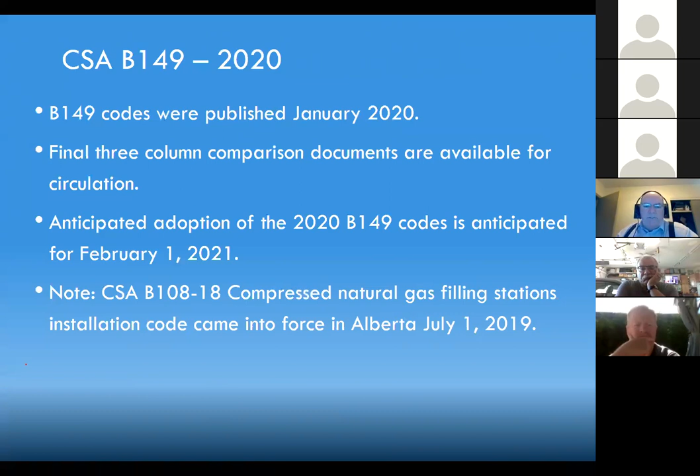I've got a couple of slides in this presentation like this that kind of keep us on topic for the major things. So these are the big things, kind of a snapshot of what we've seen in the codes. And like the last few cycles, there's been a lot of work to move propane stuff into the propane handling code, installation stuff back into the B149.1, vehicle stuff, make sure it goes into B149.5, and then what's part of an installation versus what's part of a piece of equipment or an appliance, and let's get them separated so that we don't have installers trying to figure out how to deal with approvals and certification of products that needs to go somewhere else.

So there's been lots of that movement, and again, lots of clarification to align with things that are happening in standards, both in updates, but as well I've used language in here regarding a vehicle refueling appliance, a VFA, regarding VRA. So we've used VRA for decades, but nobody else globally uses that. So this code now aligns with those reference standards, and we're going to see lots more of that type of work as natural gas expands out into different markets.

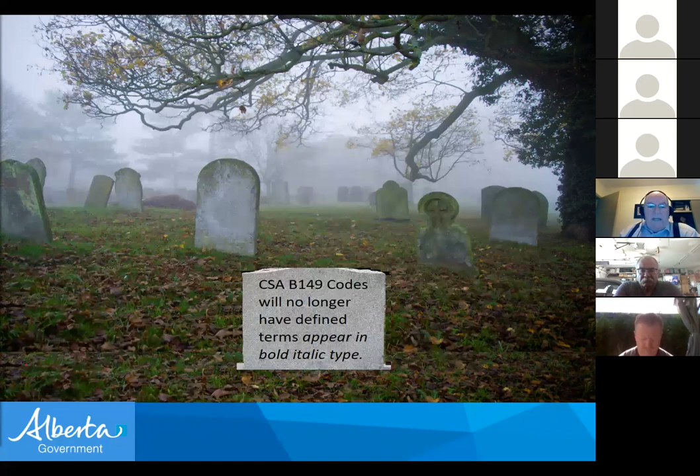So there's no bold, no underline, no markups. The codes come clean, and it's up to us to figure out what to do. So the 3-column documents are probably the best way to get that confidence. I'm not saying it's necessarily a shortcut, but CSA has made a bunch of work for every individual by managing some of their risk through disconnecting or discontinuing the ability to do this. There are a number of codes changing this way. We're not the only one, but do watch that because it's going to be some real challenge.

Now that we've started talking about some definitions, there's lots of them in there. I didn't bring up a number of them, but this is one: safe location. There were challenges nationally regarding what is the safe location.

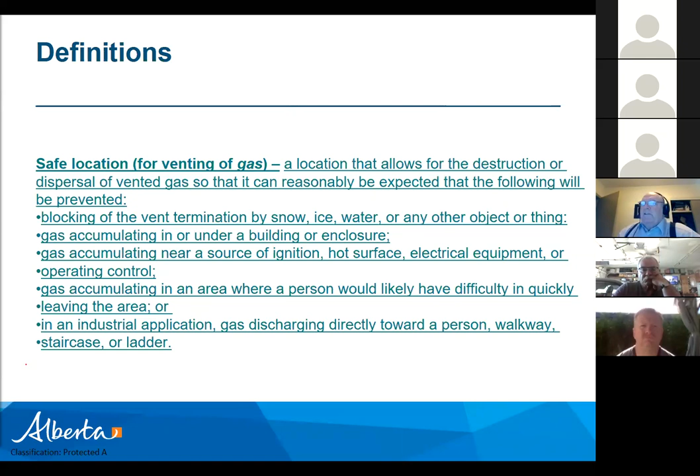If we got a terminal for a vent and it used to say outside, well, that's fine. But what happens when you're outside at an industrial site? What happens if you're outside and you terminate by the spot where people walk along with their cigarettes? So this was about trying to consider those other things. And also, what happens when you've got unknowns like raw gas, sour gas, sweet gas, dirty gas? All of these kinds of things are starting to be better embraced within the code. So this, as well as some others, is part of where that's been going. Do keep that in mind.

We've changed some things with variances through municipal affairs, allowing broader use of variances for jurisdiction-wide applications, and this is going to be continued on for variances not just for reductions in clearances, but also for equipment and materials. This is going to continue to be challenging over the next few years, and there's going to be opportunities for safety codes officers to really say we're ready for this, or figure out what they need to get ready for this. Because a lot of times in the past, we were able to say, do safety codes officers want to do this or not? And the direction from government is changing that.

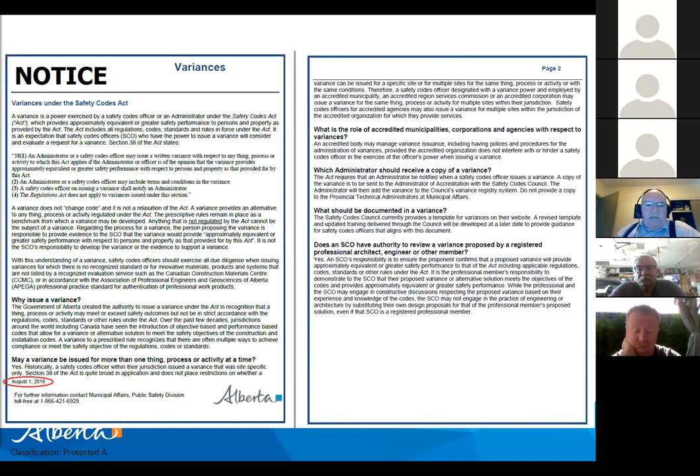These are going to be moved to the municipality. So you're going to want to consider that those variances, which were only issued by an administrator, are going to become the responsibility of the authority having jurisdiction.

Now, one example of that is regulators. We provide a province-wide variance. I'm just going to skip ahead—we can come back to that picture. So what happened with relief valves was that the code in 2015 struggled to maintain the requirements for the 6.22 and 6.18 valves.

So we created a variance to allow these reduced clearance type regulators to be installed. By having the OPCO, the overpressure cutoff type regulators that are certified, these are now available through this application. And this Standata is going to expire—on or about February 1st, this is going to disappear because it's in the new code.

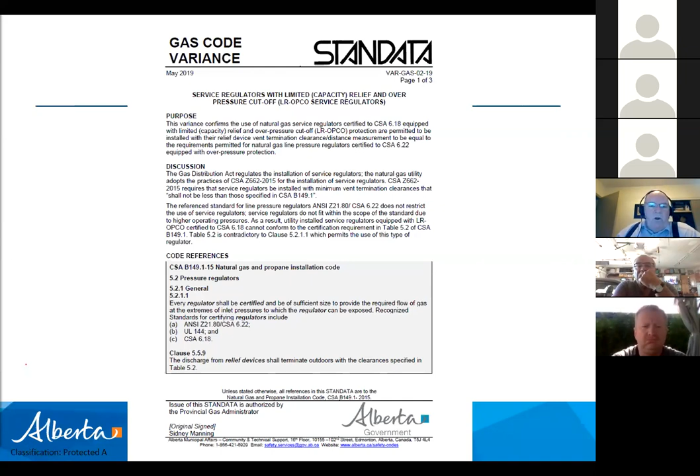This got fixed, it's part of the B149.1, and we're no longer going to continue that. So these types of valves, the regulators, will be available, and they're used almost exclusively by utilities, so they're typically outside of our jurisdiction within the gas field, but lots of people see them and they struggle with the clearances. The variances help bridge some gaps between what the utility is doing and what we're actually able to accept under the code. Now the code's going to align with that. That information's available on the website through the Standata.

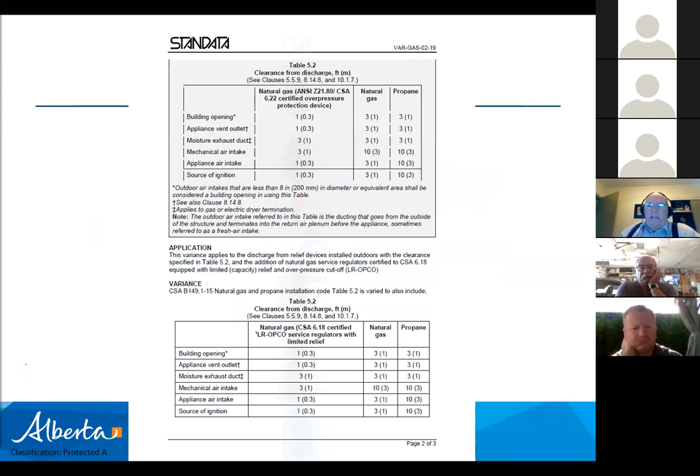In the event you're replacing a furnace, an appliance, doing something like that, and it impacts the bonding, it's now your responsibility as a gas fitter to do that, and the responsibility of the safety codes officer to make sure that this is maintained. So do keep that in mind. We want to recognize that bonding becomes a bit of an issue with that because they're concerned about lightning strikes. It's been a problem in the States, and we've discontinued these types of corrugated stainless steel tubing in the States.

They're all now using a black heavy jacket, but the yellow jacket is still approved and still being manufactured and coming to Canada. It's expected that at some point in the future this will go away and we won't see any yellow jacket anymore, just because the market will quit making it. But do keep that in mind as we go forward.

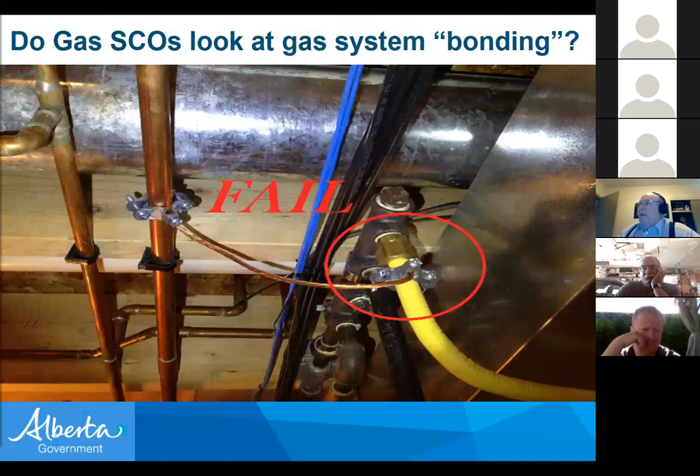So we're worried about lightning strikes. That's the driver, but it's this bonding that's going to be the critical thing we need to start looking at and learning how to do, depending upon the material, whether it's black iron, copper, or corrugated stainless steel tubing, and making sure the requirements are met as identified within the gas code.

Pressure regulators. I've had a look at this, I've been living in this code for a while. So what I've done here is put up 5.2 Pressure Regulators and 5.2.1.1. That clause basically identifies the scope of the requirements for regulators, identifying minimums and maximums.

What this clause does is identify that there are 30 clauses following it, up to about section 5.6.4, and it includes what's now renamed as Table 5.2 for pressure protection device set point requirements.

This is a monster change. Rather than spending this morning going into all of that, do keep in mind that if you take one note away from today, make it pressure regulators, section 5 of the code. That section is going to have the biggest changes affecting you guys day to day. As you're looking at gas systems, some of this other stuff will depend on what a contractor does or doesn't do, but with pressure regulators, this is going to be a big one.

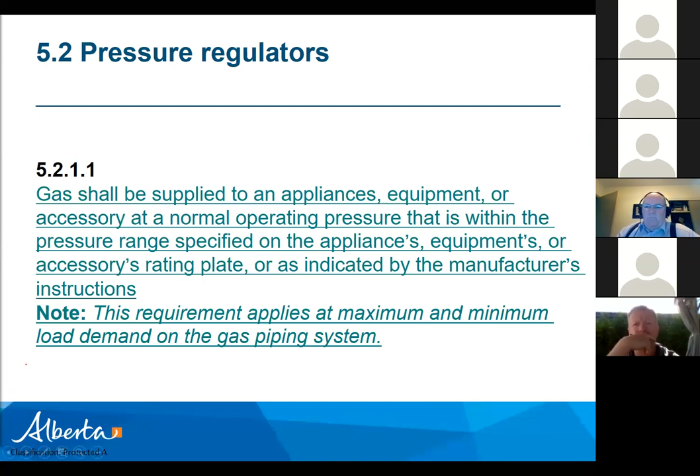You'll probably see more and more of that, because I think it's really cost effective and reasonable that we'll be seeing huge amounts of press connect come within certain contract styles, because once you get the tools, this is fast and easy to put in. We're going to have the same troubles as others with underground stuff, with yellow jacketing and

issues that may come up regarding stainless steel, etc. So be mindful there are lots of ways of looking at this, and there are reference standards that we're expecting these products to be certified to. Our regulation still requires that. It shall be certified or approved.

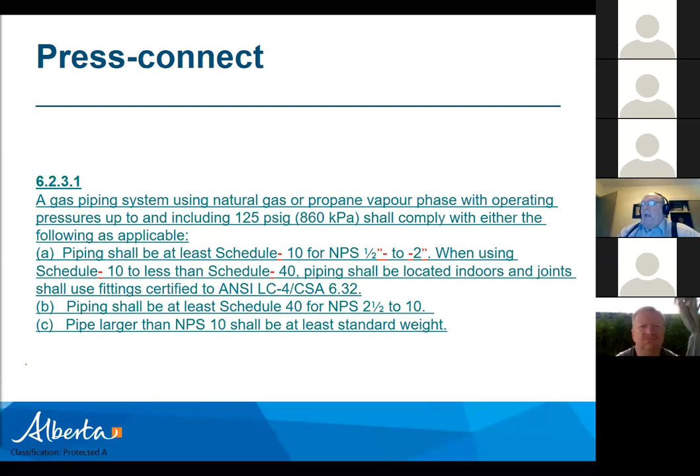So you shouldn't get some fly-by-night group trying to fit in one type of material that's incompatible. Call these guys out on it and make sure they're holding true on their requirements and documentation. This is really where the industry needs to grow into using the manufacturer's installation instructions. Where are the installation instructions for this press connect fitting? Where are the installation instructions for that furnace or hot water tank? How do you know it's compliant if those instructions aren't there?

So it's making it harder and harder to do an inspection and accept an installation if you don't have access to current, accurate manufacturer's installation instructions. So do watch that. Piping practices: there are a number of changes within the code under piping practices, but test ports is a new one.

The code change proposal said line pressure regulators have to be accurate where they're installed, because once you go through other valves and a bunch of restrictions and changes in direction, we're not getting a sense of compliance with the requirements identified in standards for line pressure regulators. So by putting a test port immediately downstream of a line pressure regulator, or as close as practicable, that gives us an opportunity to test these products and find out they're working within the scope of their certification, helping us manage the realities and variations that come into installs.

All right, you've got to have one of these things that show up every once in a while. We've been talking about projects where we've got an appliance that's discharging ice, in this case, and that's probably unsafe. At some point that could create a risk, but we're also looking at hazardous frost and ice accumulations that impact adjoining properties.

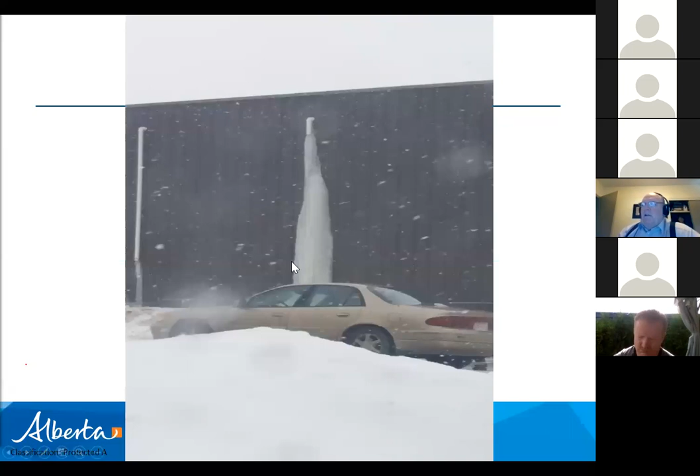So if we can make sure that a gas fitter or HVAC installation doesn't terminate a unit that has this much of a problem with water, but also, some of the other protections that can be afforded need to go where they belong.

Another one here, this is a great opportunity to identify that you can't mix PVC pipe with CPVC pipe. And in the event that that was ABS, well, there's the problem. But there are other things that could be noted in this slide, so it's not just my concern with S636 venting systems. There may be other risks here that someone could point out.

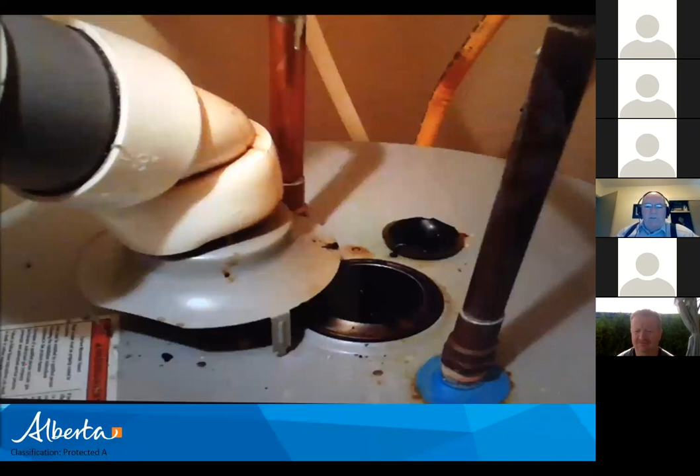I see a few of you, as I'm watching on the screen, scrunching your eyes. I'm assuming you can find other things wrong with this besides the improper use of plastic. But it might be the glue that bugs you, or maybe it's the spacing, or the attachment of the plastic to the draft hood. I'm not sure what it is, but there's other things there that you might be able to identify as an error. It gives us an opportunity to think about some other things.

So the gas codes have now recognized that when we do some of these installations, like the last one there, you want to make sure the venting's proper, and it's venting to the outside and doing those things.

Purging's become an issue. In North America, there's been some terrible disasters, not that far in the past, where purging extremely large gas lines has resulted in an unusual discharge of natural gas, and once it finds an ignition, it causes some real problems. Evidence of that has shown up in the code, which says if we get big enough lines, enough volume, enough length, we need to be looking at this differently, and we need to be purging differently, addressing it differently.

And this goes on into quite a bit of detail regarding other requirements for purging. So do watch that, particularly with large lines and large lengths, and make sure that people are thinking about this, particularly in those industrial settings where there can be unusual collections.

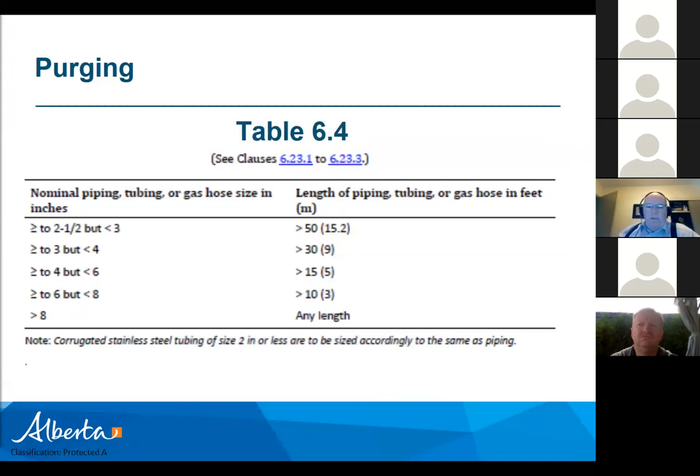Welding's a big one, because welding used to just say make sure it's welded, make sure it's good, make sure it don't leak. It doesn't say that anymore. Now welding says a whole bunch of things, and there are significant clauses regarding how to test this, how to manage some of these things, and who the responsibility is, because it's not necessarily the safety codes officer that has to do this, but somebody has to do it, and that's identified through the requirements of Annex J.

I'll just go to that. Not to minimize the prescriptive code requirements, because there's a whack of them on the gas side, but keep in mind that Annex J is normative. That means it's a mandatory part of the code - you shall do this. This isn't a suggestion, this isn't a guideline like the informative annex. This is normative. By putting all of this information, which essentially follows models out of the Z662 piping code, it gives us an opportunity to look at things.

So there's pages of stuff under here for welding. Make sure you guys look at it - it's basically about how do we make sure the installer doing this, the general contractor, has identified who the installation contractor is, how they're going to do this work, and then you'll be able to have documentation for this.

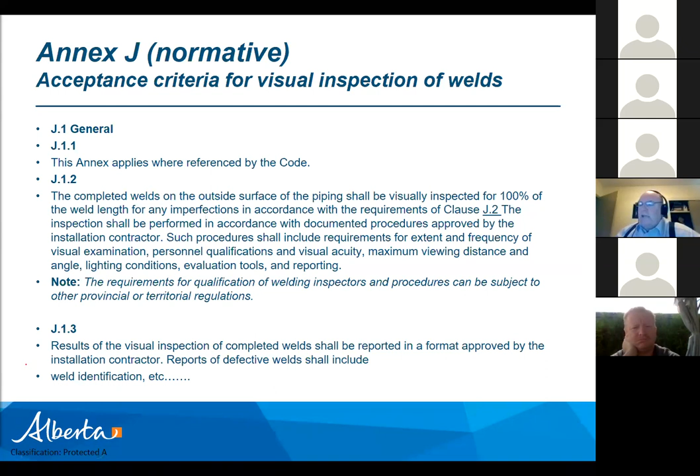It's going to be relatively simple for small diameter, small applications, but the larger applications become more rigid, and this document's going to give you some guidelines for the package you're going to be able to expect from an installer. You've got some tools to look at that package and have it mean something. So do start working with welding and those kinds of things, and like I said, the sections on welding, make sure you have familiarity with those and reference to Annex J.

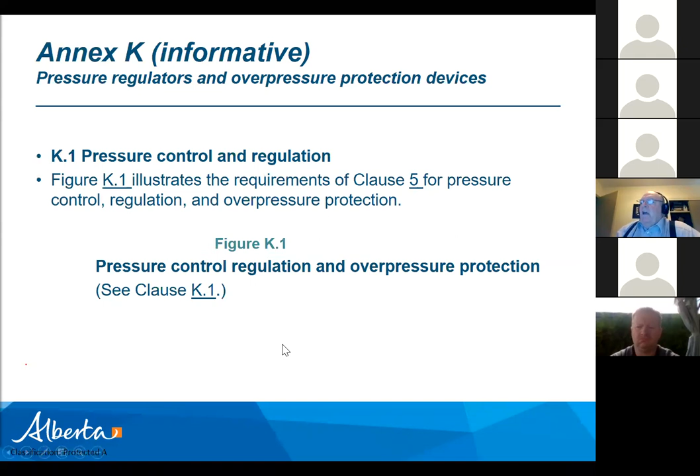Annex K is informative. It's about pressure regulators. Everything about how regulators and overpressure protection devices work was moved into the informative annex to give you some information. There's lots of documentation. It's not a mandatory part of the code, but it's a significant way of explaining what the prescriptive requirements are. We've had so much change in regulators and OPPDs that now there's a need to stay familiar with Annex K and spend some time with them.

Annex M is another normative one. This is quite unusual—we haven't historically had a lot of normative or prescriptive requirements in the form of an annex. Pipe sizing in the gas codes has always been informative. We follow it because it follows the math identified in the prescriptive requirements of the code, but if somebody wants to use the math and not follow those tables, they can. It's just that everybody finds out in the end that the tables are right, so they can twist the math around however they want, but in the end everybody goes back to the tables, even though they're informative.

This one here is normative, and this is about pyrotechnics—movies, different sporting events, stuff like that. This is about the dragon in the West Edmonton Mall that we used to have, and also about the flame at the Calgary Flames. We don't worry about it too much because that flame doesn't go off very often, but there are other projects out there that are concerned. We've actually got some stuff in the code that we've always struggled to figure out—when you're going to have a special event with unusual natural gas, propane, or other types of gases, this gives you an opportunity to do this, and it gives you some authority. If somebody says, 'Who are you and what are you doing here?' Well, there it is.

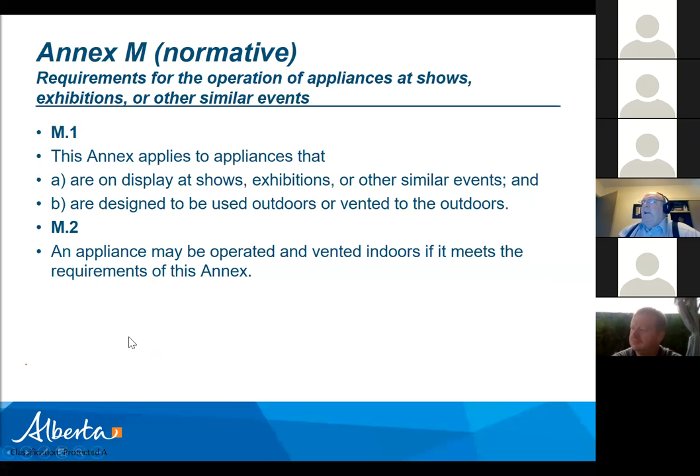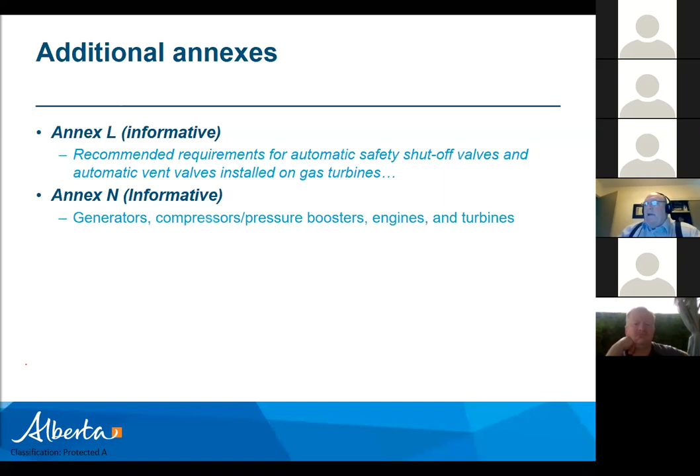There's also other additional annexes that have been added. They're informative, but covering things like safety valves and automatic vent valves for gas turbines. This isn't about approval of the turbine, but about acceptance of the installation, so there's some information there that'll give you extra guidance. And because we've moved so much into the B149.3, Annex N actually helps bridge that. It's basically giving you information right in the B149.1 that explains how to deal with the prescriptive requirements in the B149.1 and bridge into the approval requirements out of the B149.3. So do keep watching that as we go forward.

Odorization isn't a new topic, but the industry is still struggling with it. There's a requirement in the gas code for odorization to be maintained, whether it's propane or natural gas, so we expect the industry to continue to grow with that. I use this as a heads up—keep watching for it, and don't be scared to ask where's your odorization or your compliance. That includes detection and monitoring. There are other ways of reaching that prescriptive requirement.

The B149.2 has lots of stuff the same as the B149.1. We basically moved, fixed, and clarified things to hopefully make it a cleaner, more applicable storage and handling code. There's a lot about cylinder exchange systems, some introduction on small stuff about 1-pounders, and some of those challenges, exemptions for hot air balloons—we'll talk about that in a bit—as well as vaporizers, and we'll go into some more detail there. But the B149.2 was one of the cleaner codes in this cycle.

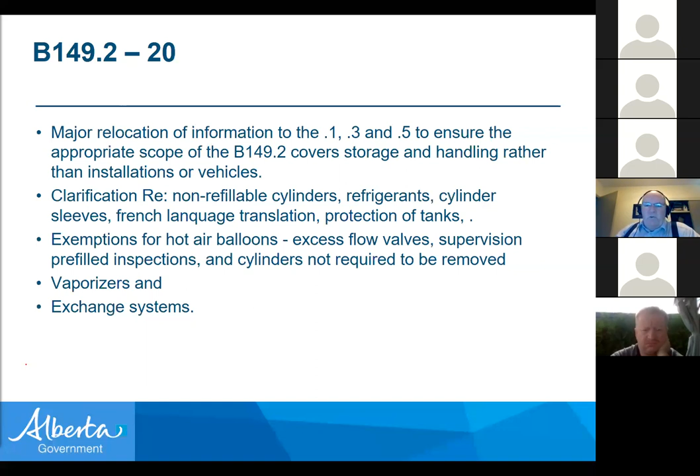There's been a few incidents across Canada where cylinder exchange cylinders have this plastic coating on the outside edge that causes corrosion and some leaking. We actually had a report in the last couple of months here in Alberta where a container leaked with deterioration under one of these sleeves.

The new code says that sleeve shall be removed every time it's filled. So whether you take it to a local co-op or to an exchange system, that exchange system can't take it back and refill it without removing that sleeve every time. Hopefully we don't see this discontinue, and it should be a fairly hard stop. Some industries already embraced it because they know it's coming, and training's being updated for propane filling attendants to recognize this type of change.

For those of you excited about riding in a hot air balloon, there's lots of stuff coming. There's now responsibilities for whoever's operating, driving, or flying this piece of equipment, who is required to understand some things about propane. And that it can be filled without removing it from the basket. That created some problems - you take all this weight out of there, and they're really hard to hold on the ground. So there were some good reasons for doing that.

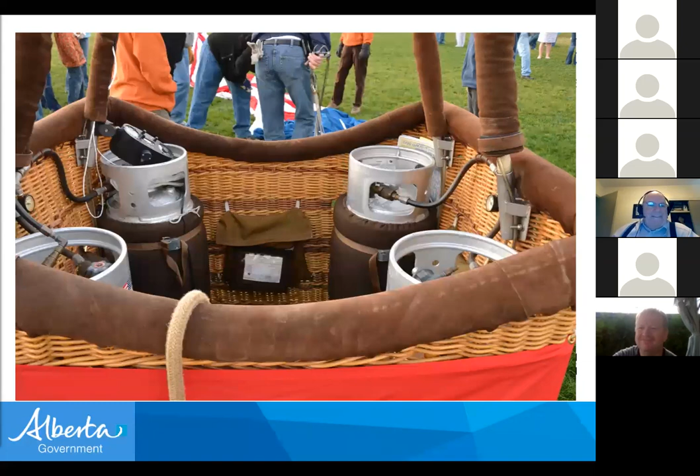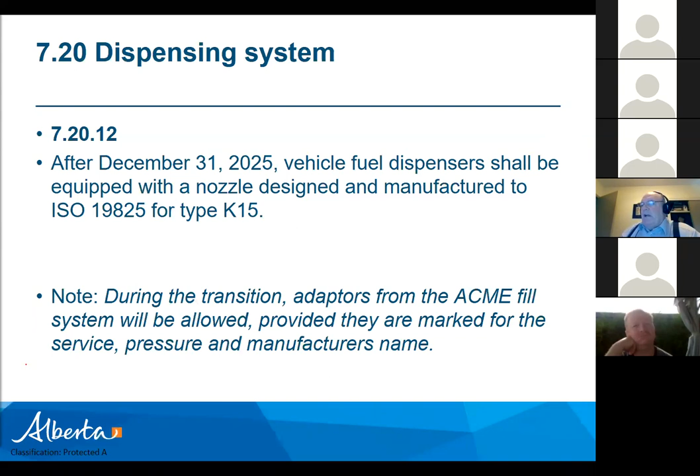Dispensing systems - all I wanted to focus on is right in the middle of the pictures, K15. What that's doing is we've got a global pressure on vehicles, so dispensing and filling is all going global. We no longer have a Canadian adapter anymore - they're all moving into the ISO style, this type K15, and others. As well as, how do we deal with all the installations in Canada that have fuel dispensers that aren't K15? Every new vehicle's K15, but every old vehicle isn't, so there's going to be a transition time, and it's placed right in the body of the code as to how we do this.

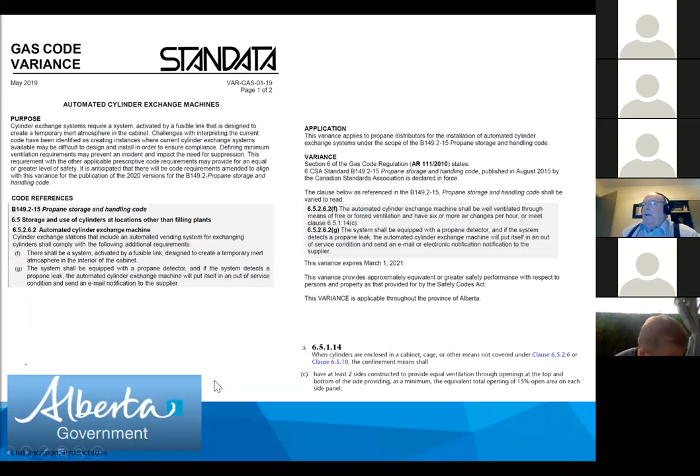Automated cylinder exchange machines - there were some problems in the old code where they couldn't manage the fire suppression requirements for automatic exchange systems. So following what was coming in the code, we provided a province-wide variance to allow this industry to do things just a little bit differently. What I found is that they're complying with the requirements of the code, except for this part.

The picture on the right is one of mine - I actually took it at a Walmart here in Edmonton. The other one is a stock photo. The problem is that all of these automatic exchange systems following this variance are being installed extremely close to smoking sections. And that's creating a problem.

I put a challenge out to the Canadian Propane Association and others and said, fix this - I'll pull the variance, we'll pull the ability to use these products if you can't get the smoking area away from it. I actually got a new picture here two weeks ago, and I'm starting a process with Walmart, and you're all welcome to help as well. If you have this, I'd appreciate any help you can give going in there - let's find a manager and let's get this moved. Get the propane moved, get the smoking section moved, make it difficult for people to use this as a shield to light their cigarettes.

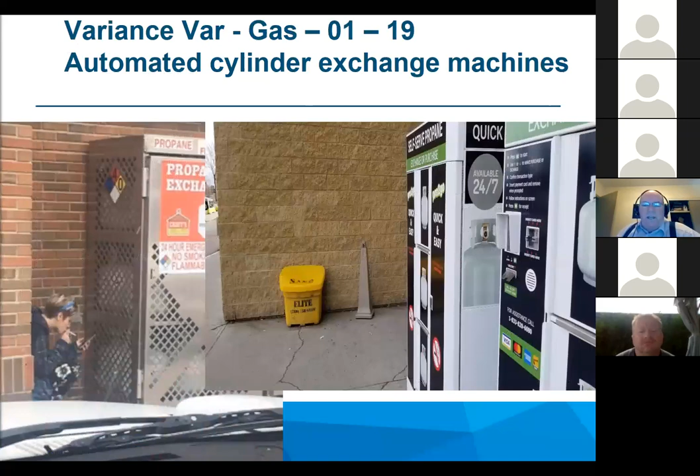Lots of additional requirements for protection and clarification around that, and some good drivers as to why we do what we do, because there's some things that have really worked around cages, maximum size of mesh, ventilation, structure, and how we tie something down - and then how they take it out to the field and drive a truck into it. Some of these are fun to watch, but there's good background on many of these code changes as to why we're headed this way.

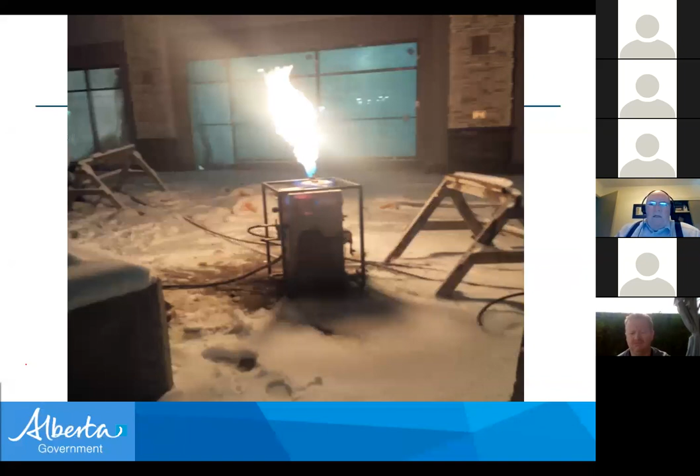Now what's happening is that we talked to the industry, and I've been saying to safety codes officers and others for years that as of January 1st, 2021, the ORD-C1349 shall be used. So that means vaporizers shall be certified. This doesn't apply retroactively, so old ones on existing installations, no problem, but new ones shall be certified. And now it's actually in the code, so great. The ORD is now a recognized Canadian standard for the purposes of certification, and so vaporizers shall be certified.

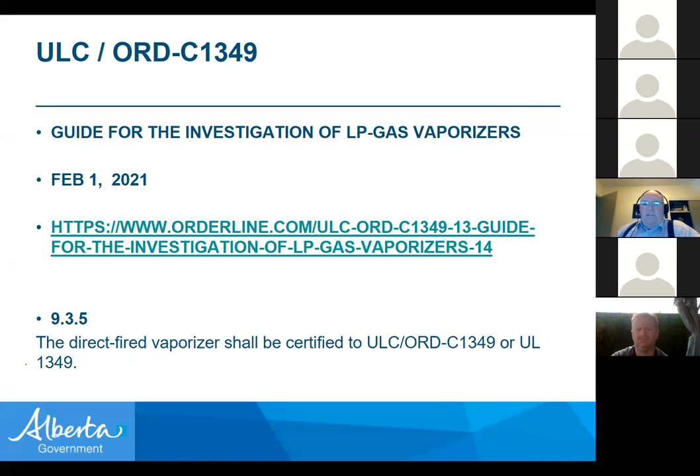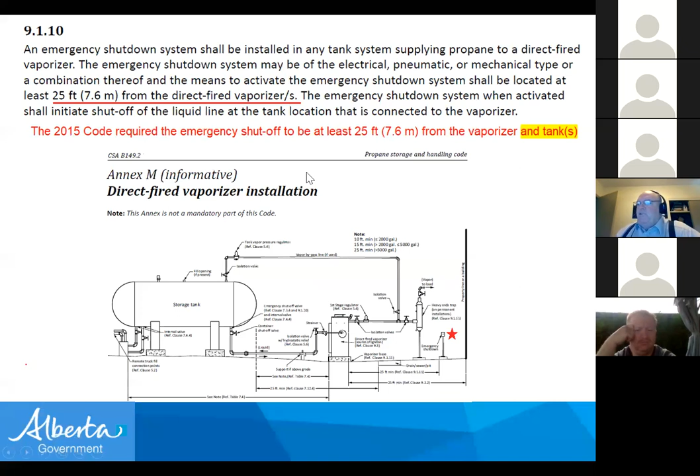Here's another vaporizer variance that came in saying we can't get 25 feet away from the tank and 25 feet away from the vaporizer on construction sites. So we allowed for a deviation from the clearance to the tank and put in some additional requirements like remote shutoffs, and there's lots of ways of doing that. I still see these fancy remote shutoffs that have been disabled. The cable's removed off of them. So when you're looking on site, make sure they're meeting the code and not pretending to meet the code. So again, watch that.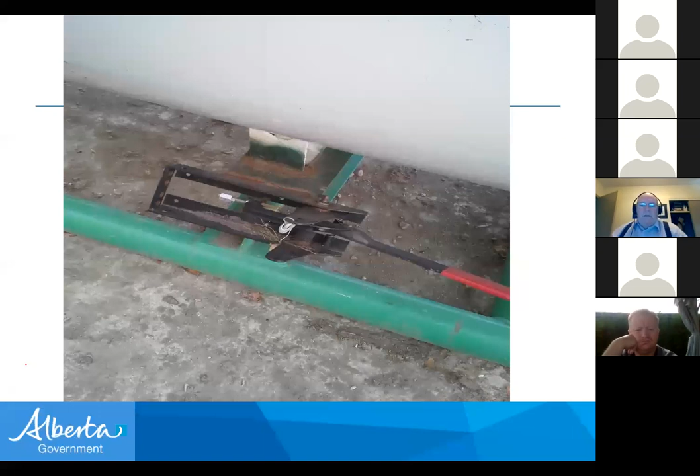to talk about these variances. Don't relax the code requirements. Don't accept something that's less than the minimum requirements. If you're going to issue a variance, it has to be done in writing. What we're continuing to struggle with is all of the anecdotal information we get from safety codes officers and others saying there's a problem and this happens all the time, but nobody's writing variances and nobody's stopping those applications that are being accepted, and so it becomes a relaxation in the permitting process or the acceptance. That safety codes officer is relaxing code, not doing his due diligence, and subject to penalties under the act.

And so when I look at these variances, a variance that I write, if there's going to be a problem with it and somebody's not going to do things... So the variance is being used with this vaporizer, but the variance isn't safe because we don't have protection from impact. We don't have the proper remotes connected for isolating the valves. Now my variance is creating an unsafe condition, and so the variance needs to be pulled. These are some of the challenges that I face, and it's a reminder for everybody else.

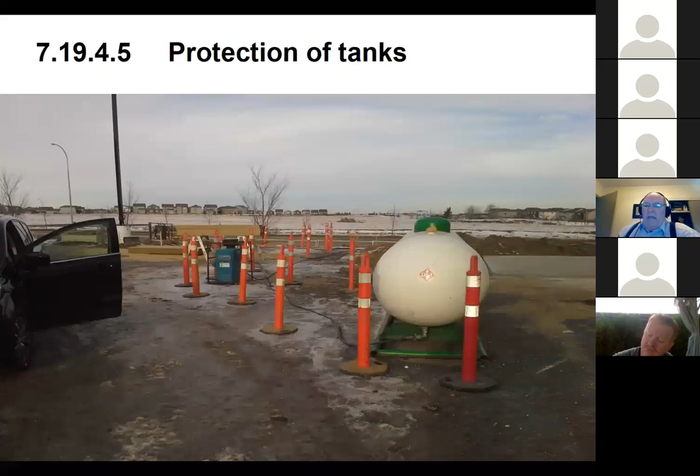This slide also identifies a bunch of additional requirements because some of the protection from impact was prohibitive on construction sites. So there's been a significant change added to the codes under 7.19 that allows for a number of different things, such as posts, guardrails, berms, and a variety of things to be able to fit multiple sites.

Just another example, this is really part of the opportunity for the Safety Codes Council and AMOS, as well as other organizations. The program for temporary construction heat and propane, trying to get these installations protected and installed properly, never goes away. And it's everybody's responsibility. Every time you go into a construction site, residential, commercial, somebody should be looking at this.

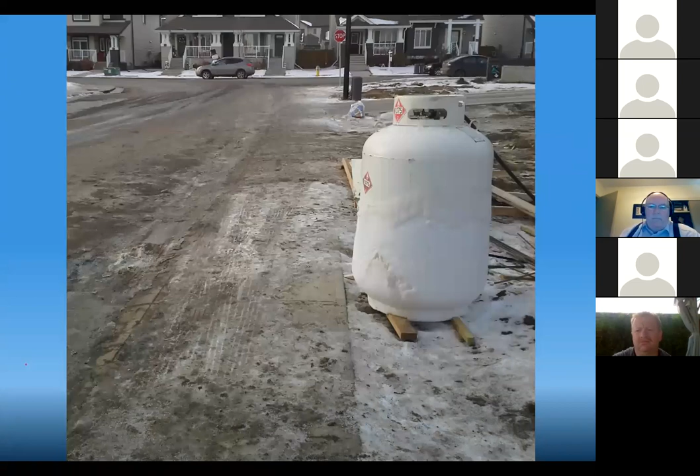And I don't care whether it's a fireman or a building safety codes officer or a guy with a driver's license. Somebody should know this ain't right. This is everybody's responsibility. How do we keep getting that information out there and education? Sometimes it's enforcement, but it could be, how do we get the tags from the council back out to AMOS and back out to everybody and hang them on here? A set of those tags from that temporary construction program would say you can't do this. And how do we continue to support that?

I had some fun this year personally trying to get some clarification over cylinders below grade at a construction site. And we did identify that cylinders shall not be installed below grade at a construction site. That was interpreted at the national level with the B149.2. And so it is going to be changed potentially for the 2025 version of the code. But for this one, it'll need to be managed either through enforcement or variance.

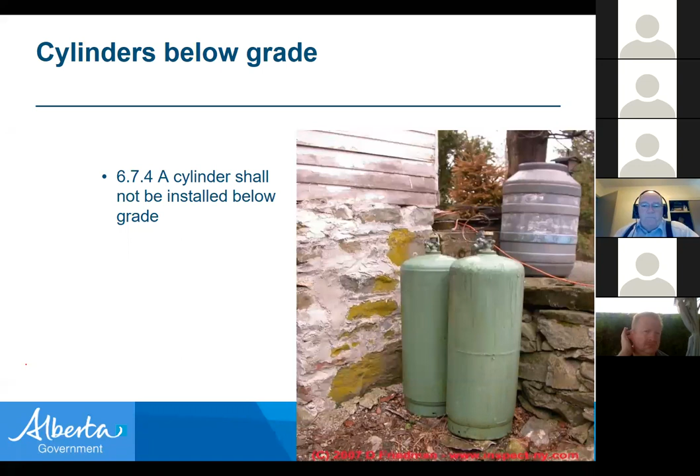In the event that you're in a construction site that's really big and all below grade, maybe there's good ways of ensuring that those cylinders can be installed. Or maybe there's a way to put a tank in there below grade and meet the prescriptive requirements of the code. So something for awareness.

This is, I'm not sure who this is. One of our co-workers has this ice resurfacing equipment, and it's maybe not a good example, but in the propane industry, we now have some clarification in the B149.2 about ice maintenance equipment, and to clarify how to protect that and how to keep people safe while we're using them.

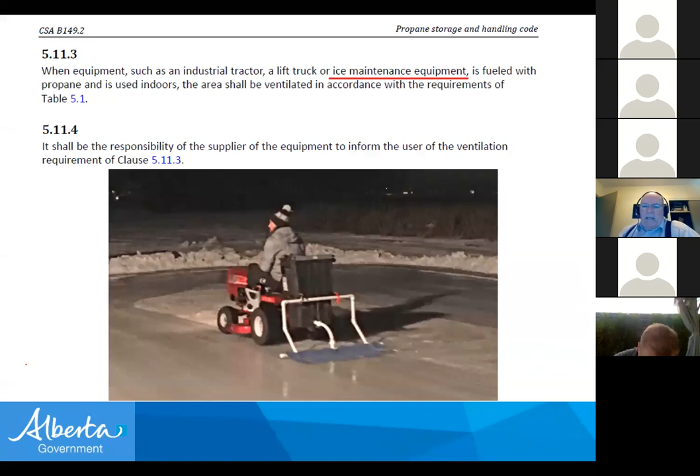Every once in a while, we still get ABS popping up in front of us. ABS that's being used in natural gas venting applications. When they replace the appliance, the hot water tank, the furnace, etc., that venting shall be abandoned. There are no options. There's no retroactivity. That new installation requires 636 venting systems. ABS ain't that. It can't be accepted.

I've had people upset about drywall ceilings and historical homes, etc. Sorry, folks, for safety's sake, and we've had some examples with some venting system failures that have caused deaths. I don't want ABS to be contributing to that, or uncertified venting systems. So that's another one to clarify.

Annex O within the B149.2 is normative. I like this. Back to that. We've got all these annexes. So you guys are going to have to use the whole bloody code. You're going to have to look at the front matter of it. You're going to have to look at the scope. You're going to have to go all the way to the back and look at the annexes because, well, they're all getting some normative ones. And that means it's prescriptive. You shall meet this requirement.

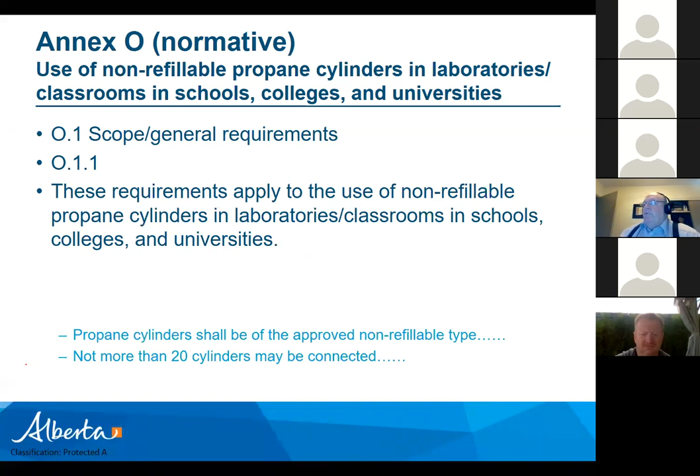So if you're using cylinders in classrooms, schools, laboratories, universities, here's a bunch of requirements. And there's pages of stuff in here. It basically says, you know, we can't use more than 20 cylinders. We can't use refillable ones in this type of application. There may be other ways of doing that, but for the use of non-refillable propane cylinders, here's what you get to do, have to do, shall do. So do keep that in mind.

Annex Q and Annex R, look at that. We get quite a few annexes. If you can count all the way up to R, there's lots of annexes. But this is the propane storage and handling code. Most of those annexes are fun. Go in and have a look at them. One's got a picture of a truck, one's got a picture of a house, all of those kinds of things. And that Q, again, is the temporary use of cylinders. It shows exhibitions, similar events.

And Annex R is the inspection and servicing of pressure relief devices on tanks. It was basically saying the pressure equipment regulator does this, but we need to know about it. And in Alberta, we actually have notices out there saying, if you're a safety codes officer or a gas fitter and you're standing in front of this container, you need to think about the relief valves. How old is this tank? Is it safe? Is it expired?

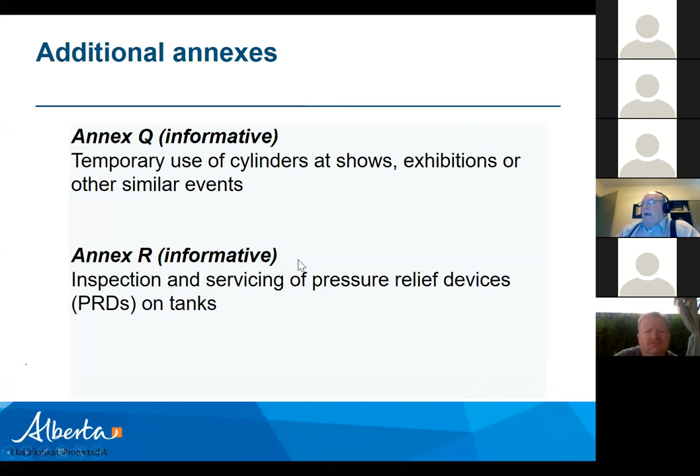You know, the owner has to fix it and they have to meet the requirements of the pressure equipment regulator. But this informative code gives us some extra guidance, and this information really follows the documentation that Alberta already has used. So continue on and enjoy that as you're able to.

So in the end, there ended up being staff on either side of the stage that could run kill switches, that if he decided to lose his mind and quit following the rules because, well, rock and roll, then somebody could override his ability to use these things and turn him off.

And so, boy, I wonder how many people think of that, having a way of turning a man off, even a musician such as these guys.

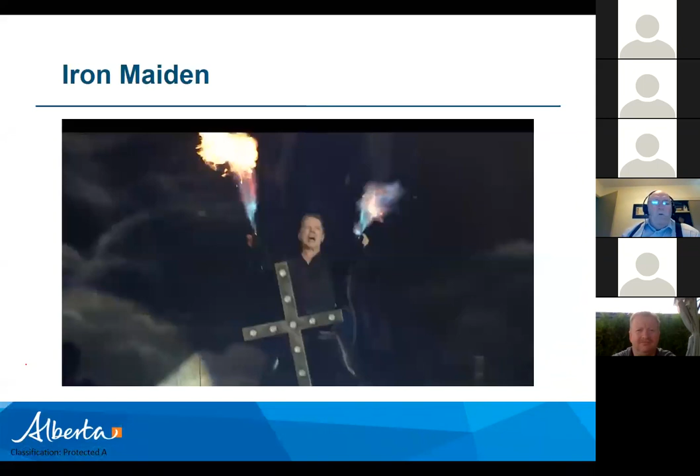But anyway, I digress. We need to stay on topic here because we've been about an hour and 10 minutes into the presentation. We're on track here at the moment, but I can skip over some stuff fairly quickly. So as we go through this, in the event that I skip over some things and you want to go back to the items on the slides, there will be an opportunity to look at this and see if there's information or questions that would arise after the fact.

Well, the B149.3 is a code for the field approval of fuel-related components on appliances and equipment. Oh, no, it's not. It's now the code for field approval of fuel-burning appliances and equipment. So name change, lots of relocation following the other codes, same kind of stuff. Again, this is a highly technical code, significant input in improving the quality of prescriptive requirements for certified products, for products that fall within their appropriate scope of application.

And that the valves, regulators, piping assemblies, etc. And then, as we've been talking along this morning, engines, turbines, and compressors have been relocated into there. And that's going to bring about some other challenges for us. Appliances in complex and in integrated facilities. I'll talk about that in a couple of minutes here. The metric versus NPS, that's still happening.

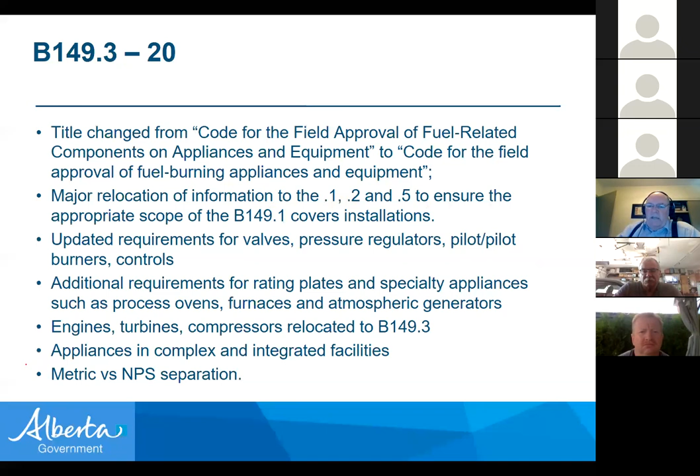There's also a number of annexes, and we'll talk about that. Mobile outdoor units has come into this system in Annex J. Annex K for turbines is in there as well, and we'll talk about a couple of other annexes as well.

There's still stuff, you can find pieces that are arbitrarily designed this way and thrown in there, whether somebody's using a variance wrong, whether somebody's using their staff wrong, whether a guy with a driver's license and a pipe wrench is thinking he's got a get-her-done approach.

So keep watching these. The stationary engines, lots of them, hundreds of thousands of them, they're relatively small. These are V6, V8 engines running pump hydraulics, heat tracing, motive power generators. They're doing lots of work, but boy, lots of them are natural gas. So we're moving now into certification and approval of these engines.

So there's a UL 2200, this UL 2200 is a certification standard for engines. And so it doesn't cover many of them yet, but it continues to grow. So soon we're going to see engines that are certified, and they'll be compared to engines that are approved. So we've got an engine that's certified or an engine that is approved. We're aligning with our regulation, and then you look at the installation and the prescriptive requirements in the code.

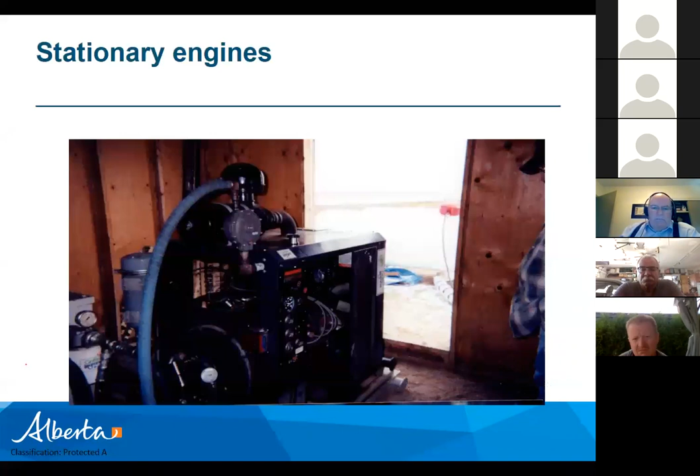Now, because this affects so many installations out there, and again, lots of them are relatively simple, and we historically haven't looked at the engine. We've been silent on that. We're looking at the fuel train to the engine. We do get worried about things like hose clamps, but we look at safety shutoff valves and how this is managed. And some of that's being clarified, simplified, some of that work's going away.

But we have a huge push from industry. Industry's looking at this new code saying the B149.3 now requires a field approval. We don't want that. In Alberta, we want the safety codes officer to continue to accept these installations like they always have.

So here's my ask, and this is my biggest ask for today, to all of the safety codes officers out there. Let me know how many gas permits you look at, because they say SCOs are looking at all of these right now. They're all permitted and they're all being done acceptably. We don't want to change things and get a field approval. So I need to know from safety codes officers how many of these engines are being installed out there and how many are being permitted. If you guys are looking at hundreds of them, well, maybe they've got something to say.

If you guys are looking at none of them and you have no gas permits for engines, that doesn't matter whether this is Calgary or Lethbridge or the MD of Opportunity, there's engines out there, and they require permits, they require compliance with the Act. Where's the problem with these? What's happening with these? And is Alberta in a position to write a province-wide variance to support safety codes officers continuing to look at these very small engines? I'm not talking about big turbines or the big Caterpillars that are running at 500 RPM and 2.5 stories tall. Big engines, turbines, they're complex. They're always going to be in this new structure with field approvals and installation.

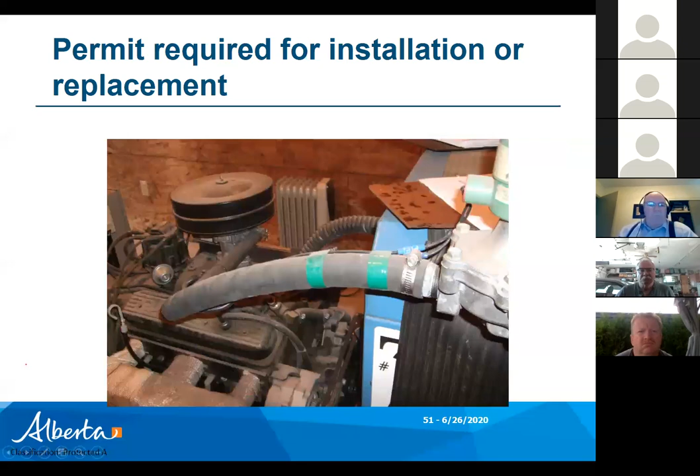Here's one that came from one of our guests today. This is a cogen, it actually came from a couple of guys. The picture's really busy, but I kind of wanted to show everybody here. We got a cogen facility where they're burning natural gas, producing electricity, hot water, doing other things with it.

But we've got close nipples in the gas line. We've got street 90s in the gas line. We've got some you can see are literally bottomed out. There isn't a thread left in them. And are they properly sealed, tested? What was the requirements that they used for it?

Anybody that looks over in the right-hand corner is going to be able to see that this engine meets US EPA. That triggers a funny, the hair stands up on the back of my neck when engine is spelled E-N-I-G-N-E.

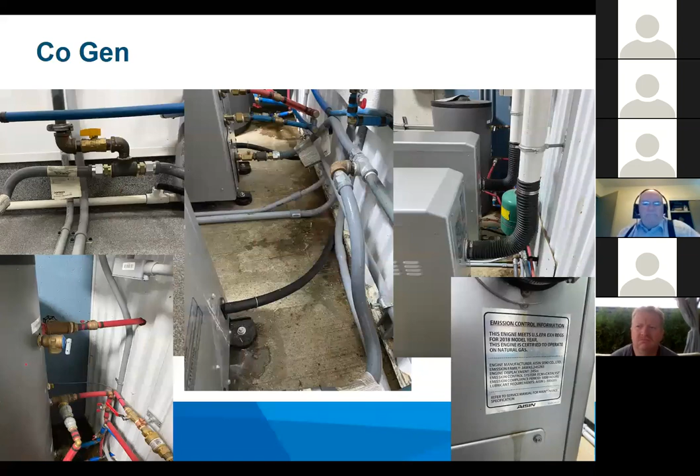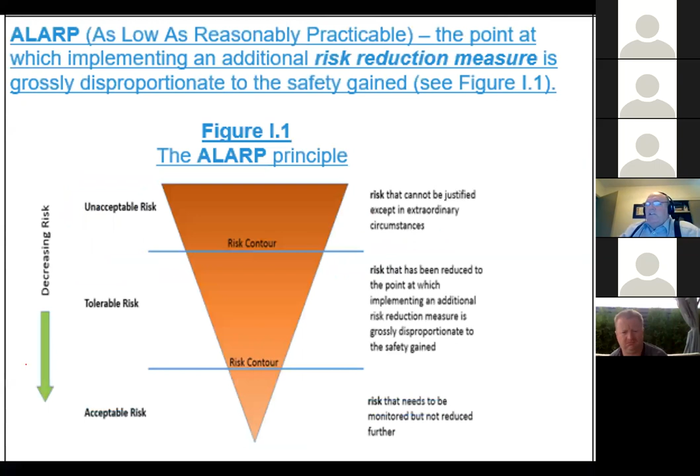Annex I, I'm not going to go through this in too much detail today, but this is the big deal in the B149.3 — it's about the risk-based approach to evaluating equipment. But it's not simple. You can't just say I did a risk-based approach and be done. No, they've got to prove how they've done that. How did they reach that? How did they establish a team? And the team needs to have evidence, history, experience, and professional foundation.

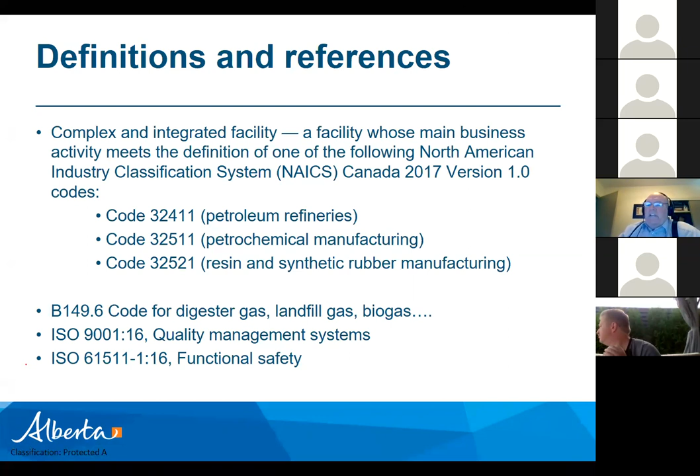So complex and integrated facility has been put in this code so that Annex I, even though it's informative, doesn't get used just anywhere. It gets used at a complex and integrated facility — a petroleum refinery, a manufacturing petrochemical facility, resin and synthetic rubber manufacturing. So if a lumber mill wants to use Annex I, they need to do it through a variance process. There is no other way for them to consider that objective-based approach, because it's only defined to be considered within that informative annex as a complex and integrated facility. Again, this is about trying to manage who wants Annex I, who can use it, and what it's going to do for us.

Annex J, mobile outdoor food equipment — we now have an informative annex. This is taking a bunch of stuff out of NFPA 96 that follows what our STANDATA in Alberta for mobile food trucks is, and it's putting it in the body of the code. So this is our first step towards getting mobile equipment and mobile food service equipment in the code. The information's there to use as a guide for those prescriptive requirements that have the ability to use that. It's a significant step, and it's really started national discussions about what's portable, what's on wheels, how we're going to deal with that stuff. I'll get back to that in just a minute here.

Again, a bit of a change of pace. Don't forget to remind gas fitters when you talk to them, use backups.

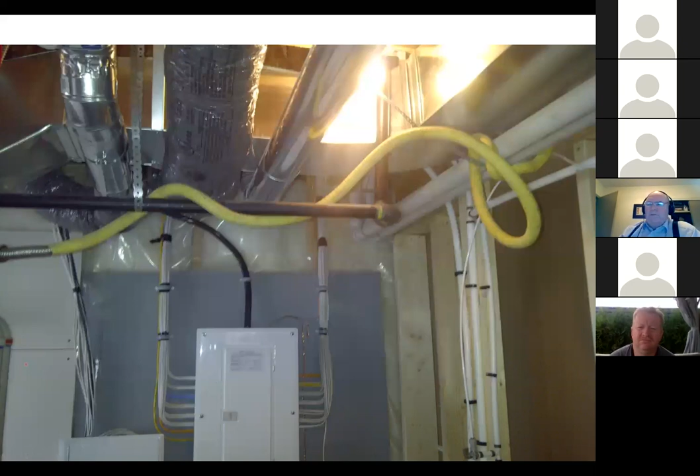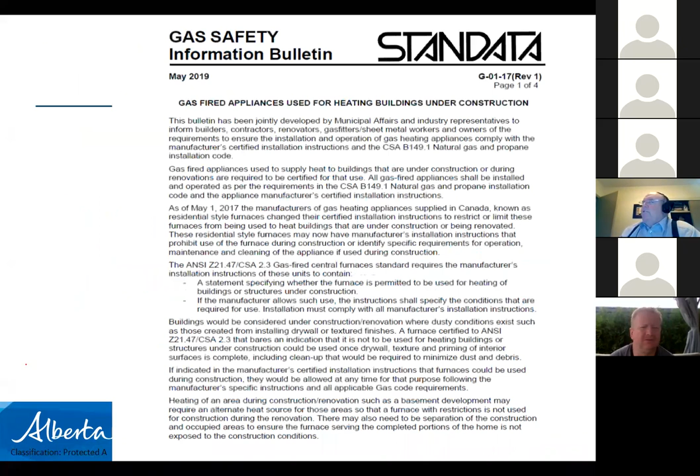So gas-fired, this is a bit of housekeeping here with municipal affairs. Gas-fired appliances for heating buildings under construction - it's still out there, and it's going to be out there because we still get some furnaces that are used for construction and not maintained properly. And so there's more and more pressure saying this is up to the authority having jurisdiction.

That enforcement is responsible for making sure that the manufacturer's installation instructions are maintained. And so temporary heat furnaces that are used for occupancy need to be able to be inspected and cleaned properly and maintained properly, meet the minimum requirements, including potentially proving efficiency rates. So combustion analysis and those kind of things are going to be necessary in order to do a final inspection on a house.

You're going to see a furnace, regardless of whether it was used for construction or not. You're going to have to see a prescriptive set of requirements, including a report that says that appliance is fine to use. Or maybe you have to assume it's at 80% of its life expectancy and doesn't meet the intent of the code.

So we'll be talking about that more as the new standard for furnaces comes out, because there's lots of stuff still happening nationally regarding if you build a $500,000 house, chances are you're going to want a new furnace, and lots of people aren't. And that might just be my opinion. Strike that from the record, whoever's recording the show.

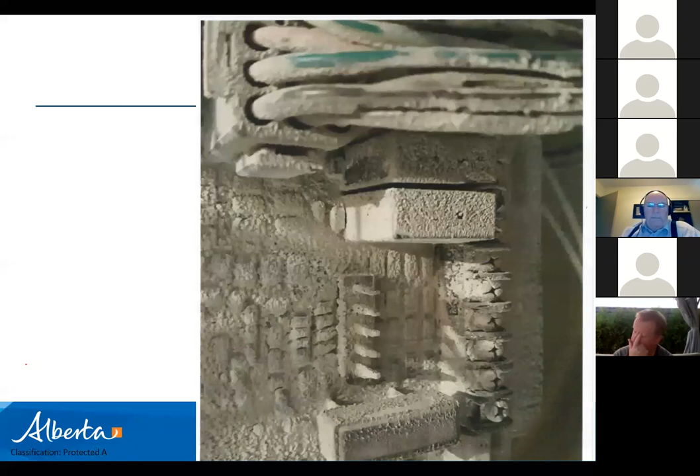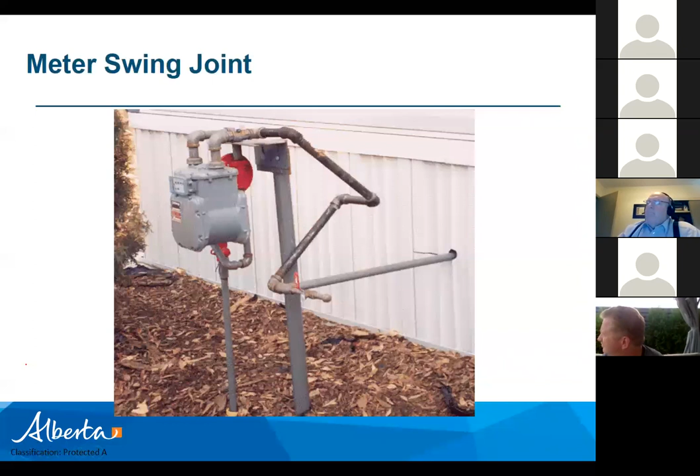Swing joints. This is certainly a cool picture of a swing joint, but it's also an issue where we're talking about what the regulators are doing, where the regulators are, the meter, what's the utility doing, and what's their role. And as the Safety Codes Council sub-council looks at the permit regulation, we're talking about what is the role of the utility and where is the jurisdiction. At what point do we want to end where this meter sits?

And again, this is another one. The regulators that are venting out of there need to be considered. And after effects of who was first, who was second, isn't always something we can identify and may not matter.

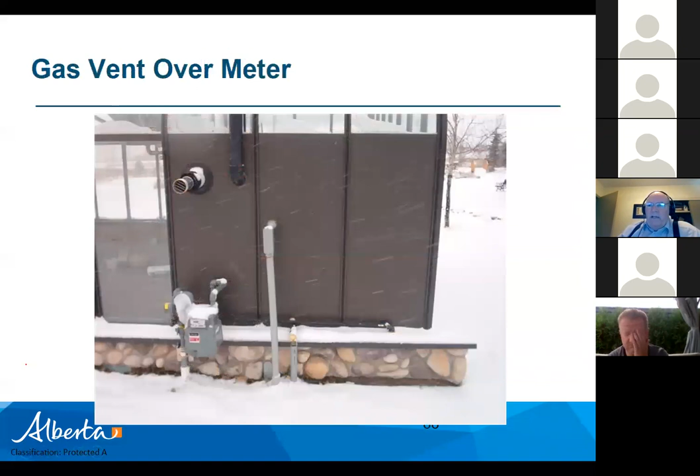Again, this is part of the national discussion to consider what about adjoining property? What about hazardous frost and ice accumulations? Should other codes be in on this so that we can get the support we need?

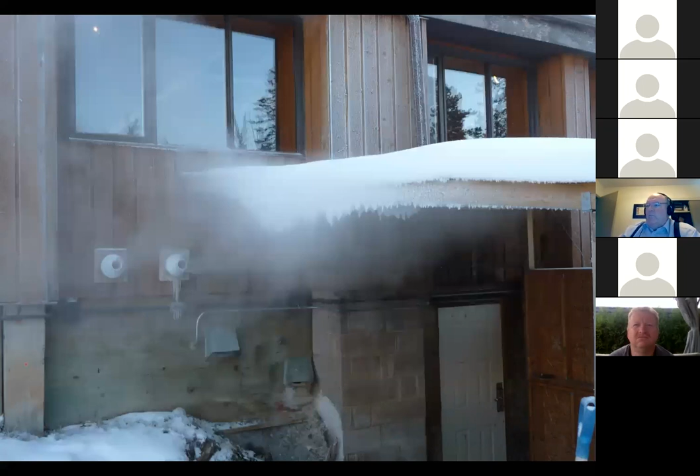Certified versus modified. If you've got a certified piece of equipment, it falls under the gas code regulation, no problem. As soon as they modify it, change the valve that's part of that certification, it's now an uncertified piece of equipment. It needs to be field approved or removed.

So I want everybody to keep being mindful of that. Is it certified and is it as intended, or has it been modified beyond its scope?

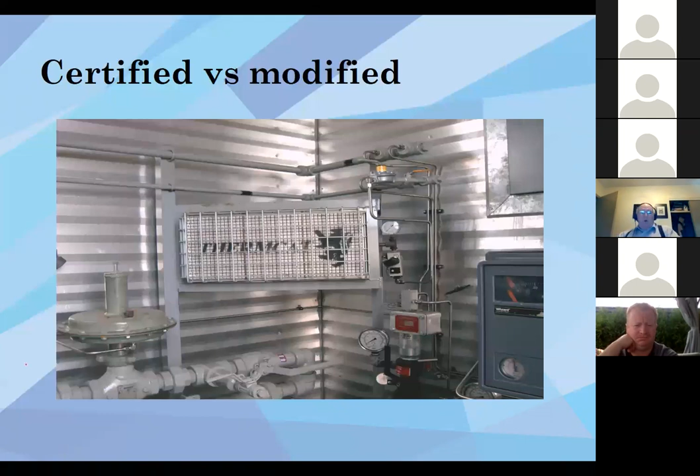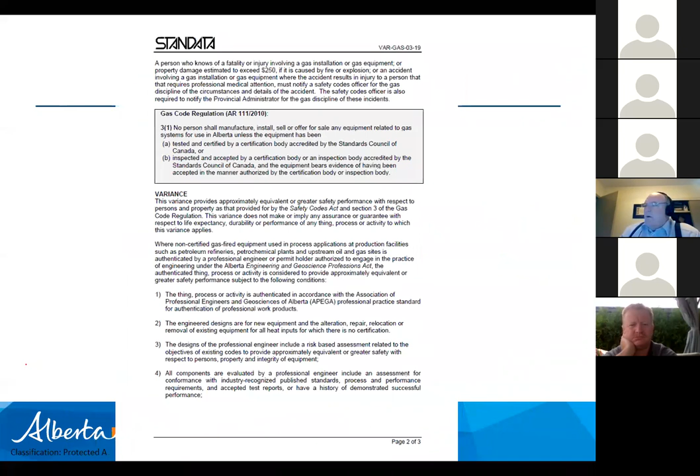The province-wide variance for authentication at oil field sites, it's continuing to be utilized out there. I have heard information that people are concerned about how it's getting used or unused or misused, and continue to look for information back from the industry about what works and what doesn't work.

We need to have these uncertified pieces of fired equipment labeled and in a way that when you show up at that installation, you can recognize that label. And you know whether it's engineered with the variance, a third-party inspection body, and you know that it's designed for that location and hasn't been relocated without an approval.

Then as soon as they put this tank on wheels, then we have to have a different conversation. And that one we'll have for another day, but I'll try to keep that in mind.

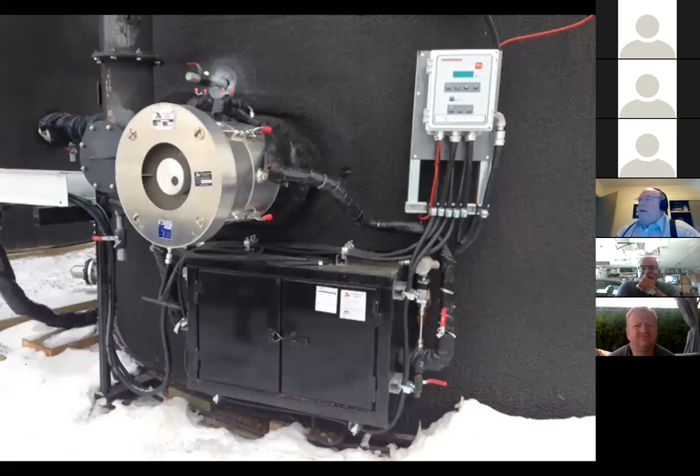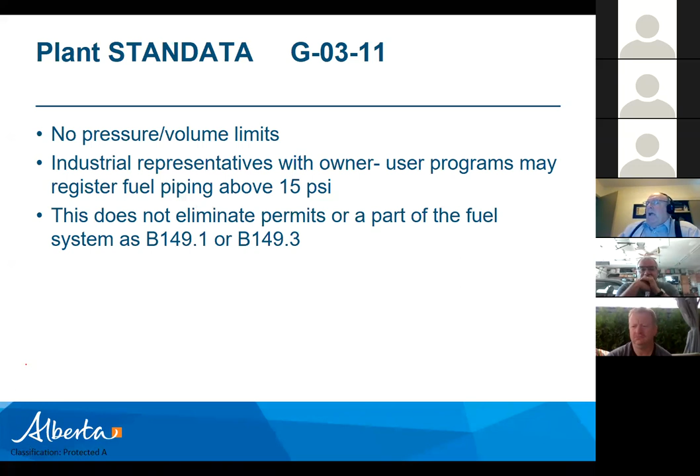The plant STANDATA that's really is being modified at the moment, and we have industry coming up with some new drawings on it to be able to help us talk about where's the difference between the utility and the gas installation, and the difference between the gas installation, pressure equipment installation, and what happens when we bring in the energy regulator or others. So we'll be seeing these, all of the STANDATA updated by the end of 2020, but this is one that I hope to see really mature. ABSA is currently working on this, as well as a handful of other documents.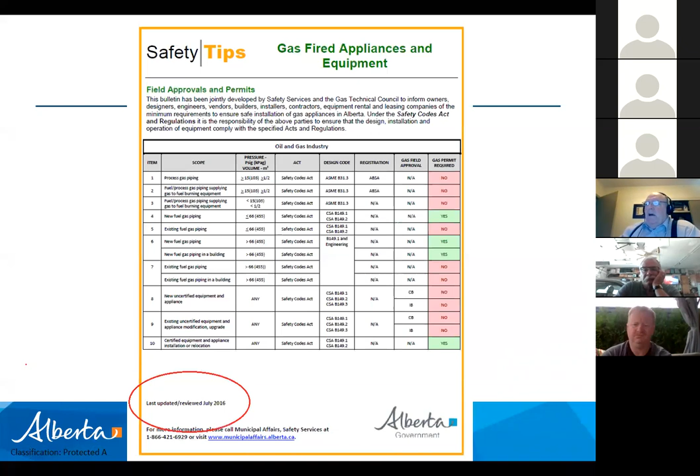Our tip sheet for appliances is getting old. It doesn't match the current province-wide variance, and we're looking at what value it has regarding the oil and gas industry versus other portions of the industry, like pulp and paper, power generation, etc. Is it really helping us, and should it be updated or not? So we'll be looking at that this summer and fall.

Legacy equipment terminated at the end of December. The program is closed. We had huge growth in compliance with the industry, but also a huge growth in understanding for the industry with how to do it. Now, not everybody's got it right, but the program did end, and now people are asking, well, what about legacy equipment for engines? Engines were never part of legacy equipment. They were never part of an exemption. They were never part of a variance, ever. They were always part of the gas code regulation and always required compliance. So I'm doing my best to discourage any legacy type program for anything as we go forward.

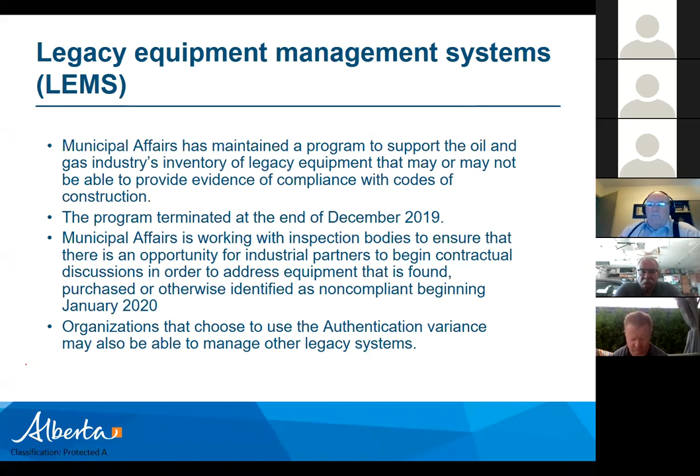We did that for that time, and the industry has been supported through the development of IBs and inspection body programs, as well as province-wide variances, for better or for worse, and they have the tools to comply. So that notice that's shown there has now expired, and as part of red tape reduction, it'll be removed as recognized through that process in government.

In the industry, we talk about uncertified appliances, and I talk lots about engines today, but it goes far beyond that. Here's an example of a propane container inside a job shack right next to the diesel fuel. That way, they never have problems with vaporization rates.

I apologize, folks, if I'm being smart over something that's really non-compliant. I don't intend that. This cannot ever be done. So my intent to try to keep the conversation light doesn't undermine this. If this is an empty steel container, sure, they can store it in there. If this is a propane container, it cannot ever be in there. So thanks for that.

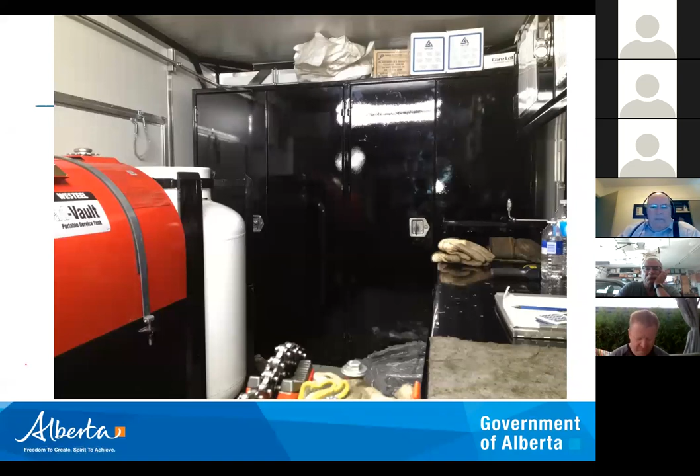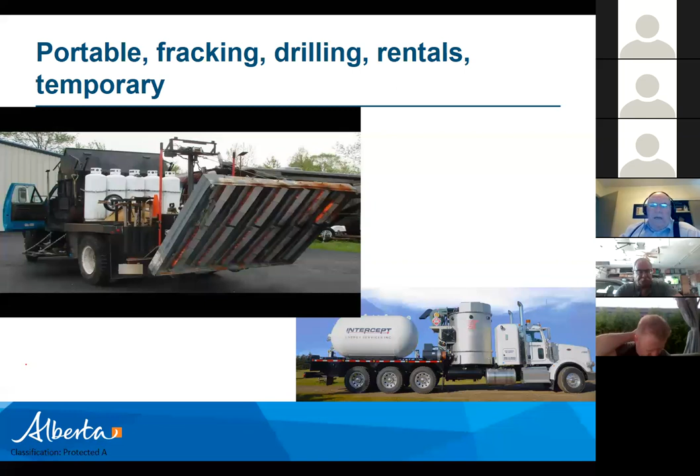Stuff on wheels is becoming a big topic nationally, all over the place. I've had issues with this. We've got some asphalt heating equipment here, some fracking equipment, and as soon as you get these out there, they still need to be approved or certified. They still need to be managing this. Now, we may not see permits for them all the time, but it does come up.

Here's an agricultural burner that's used for sterilization of the ground, or at least for burning soil and weed control. Some of these are do-it-yourselfers, some are quite sophisticated, and yet they need to be compliant, and we need to have containers that can be moved with product in them. A container that can't be moved with more than 5% is improper here, and this is actually one of them. This container can't be used in this application.

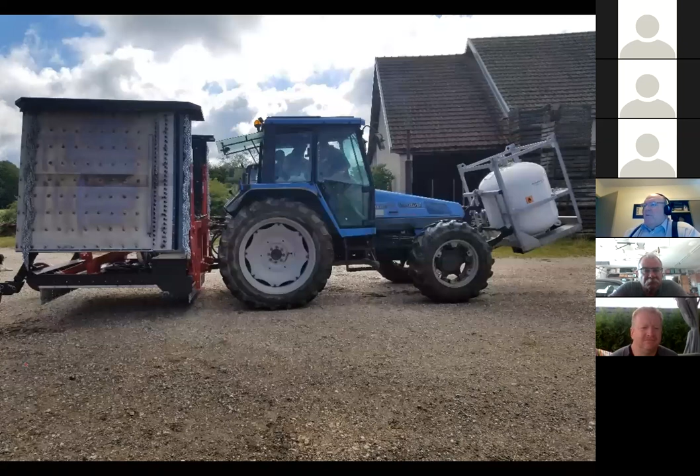But we're seeing new stuff coming in from Europe, as this is identified as a green machine. So we're seeing some of these approved in the Alberta market, and they have different levels of sophistication and different potential volumes for propane, and different examples of success.

The B108 and B109 - wanted to just touch base with them to say the 2020 code of the B108 is due the 1st of 2021, and the 2021 code of the B109 is due at the end of 2021. So we're very close. We might see the 2020 code of the B108 here this year, so that triggers that within one year it comes into force.

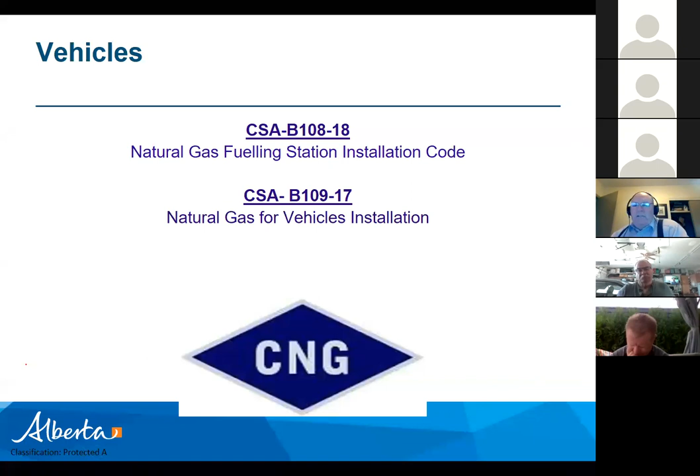These types of installations, whether at a drilling rig, a fracking assembly, or in a parking lot somewhere in a jurisdiction near you, are filling highway tractors with LNG. What happens if a farmer figures out how to do this, and we start seeing John Deere out there with LNG on it? It's like a domino - when somebody figures out how to do this with LNG, there'll be no stopping it. I can't believe John Deere doesn't have one out yet.

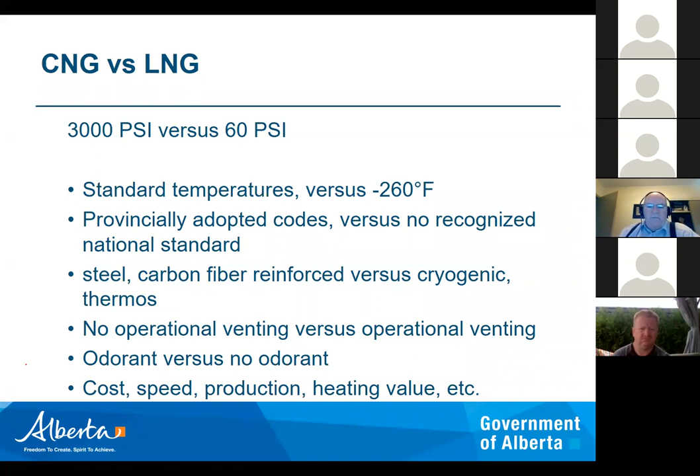Just some generic stuff to keep in mind: LNG and CNG are such different animals. Odorant versus no odorant, pressure versus temperature, the structure, the potential energy held in LNG is totally different than CNG. They're really different animals - keep thinking that way.

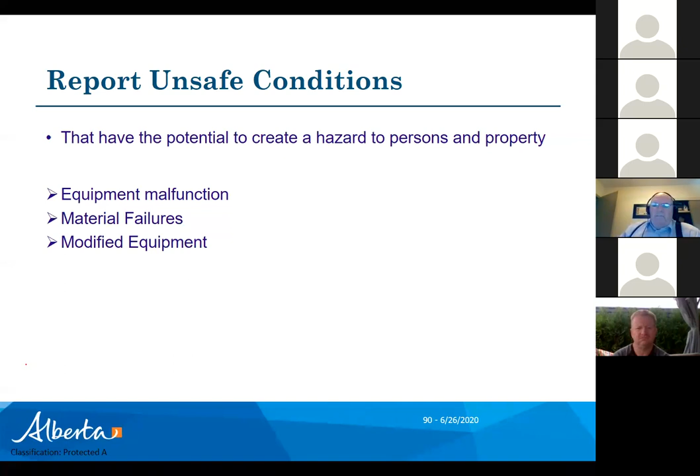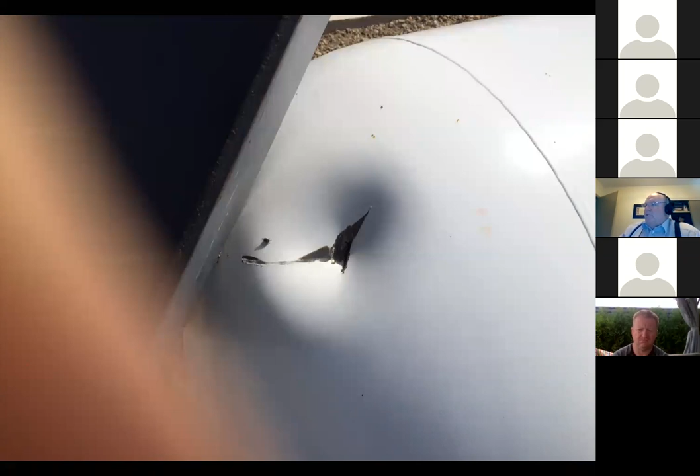Okay, so we've got unsafe conditions. That's for me - keep letting me know when you see stuff, hear stuff, what's happening out there. Because if an issue happens and it creates a fire, explosion, or property damage due to that fire, it shall be reported. But I'm certainly interested in finding out what's happening out there in the industry.

This is one of mine from last summer at a rodeo in eastern Alberta, where the deep fryer was way too hot inside, so they brought it outside. It's always fun to look at this and think, did they really have to install it that way? Did they really have to put the hottest piece of appliance with boiling oil in the entire facility that close to a container?

And just because it's rated for installation on a combustible floor doesn't mean you'll always get away with it. What happens when it's installed improperly? What happens when manufacturer's installation instructions aren't completed, or the piece of equipment isn't assembled properly and overfires or creates some other opportunity?

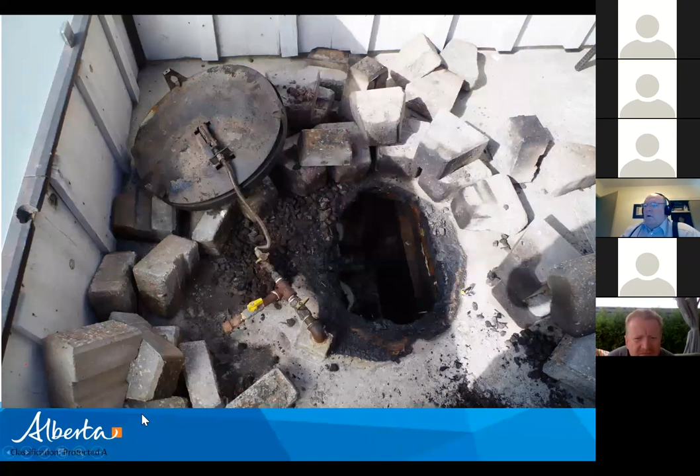Here's one from just a couple weeks ago. Lots of you folks have seen this on the news - this explosion, and I'm assuming some fire, but very little fire damage. The explosion was so great. Family of six sent to the hospital. This is in central northern Alberta, and this was done with a 1-pound cylinder.

The investigation identified that it may not have been impacted by the 20-pounders - the two 20-pounders that are at the front of this fifth wheel - but there was a 1-pound container with a camping heater, which is for use outside only, that was stored, or rather found, in the shower compartment.

What this brings up for today is that across Canada, we're struggling with 1-pound containers. What happens when people start refilling 1-pound refillable containers themselves because they can't normally do that? You need to be properly qualified to refill them. What happens when people start refilling non-refillable 1-pound containers?

Because there's a bunch of adapters on the internet that are available out there, and I hate to see people using them, yet we're not seeing a lot of examples. The problems with the release of gas a lot of times aren't creating an incident that brings in the authorities, and people aren't willing to say 'I bought an illegal adapter off Amazon and I use it all the time' - except when we're sitting around at our wine and cheese functions. You hear about the odd adapter that somebody's heard of or seen. I don't know anybody that's ever bought one, but I hear lots of stories about them.

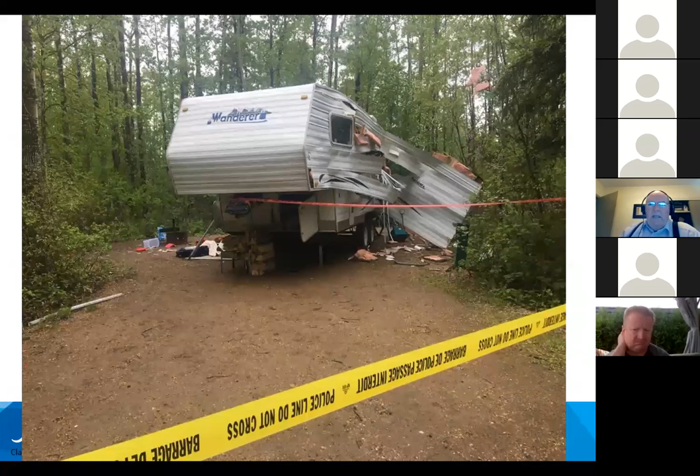That's essentially the end of today's presentation for the gas discipline, but I have a couple other slides just to address questions people have sent me recently, and to let everybody know I'm still thinking about plumbing. The 2020 plumbing code is expected in spring of 2021 - that's going to be tough. It'll still say 2020 even if it's published later in 2021, and then we'll start that process. But we should have a 3-column comparison document clean and available this fall.

So hopefully for the AMMS meetings, we'll have that document available to share. We're still working with Alberta Environment and Alberta Health on the water reuse policy documents. These are monster documents, and I think they're critical for Alberta to say, here's how you know whose responsibility it is. This is the municipalities, this is Environment's, this is Municipal Affairs, or this is the local authorities.

As well as, what's the water quality? Here's the water you got. You're taking it out of a pond, out of a sewer, out of the air, whatever you're doing. And here's what you're going to treat it to. And this is what you're going to get in the end. And here's how you maintain it. These are really big steps, and they've been really important.

And we've sure been impacted by government, by things like COVID and stuff like that. But I know some really bright people are still working really hard on this. And don't give up hope. Guys, hang in there. These documents are going to help us, and they're coming. I know some of you have worked on the documents, and hopefully we'll be able to see them sooner rather than later.

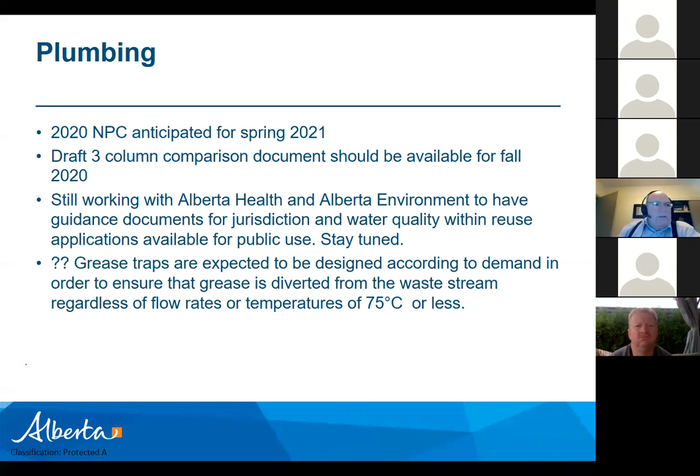So that's something we can look at more, but I wanted to say that you can put a grease trap in a system that has temperatures of no more than 75, so 75 degrees C or less. And you're right, boy, you could take a lot of grease in that temperature water forward, so that has to be designed to retain it long enough to allow for that separation or to have other action that makes sure that that grease is not entrained in the waste stream. Hopefully that answered that.